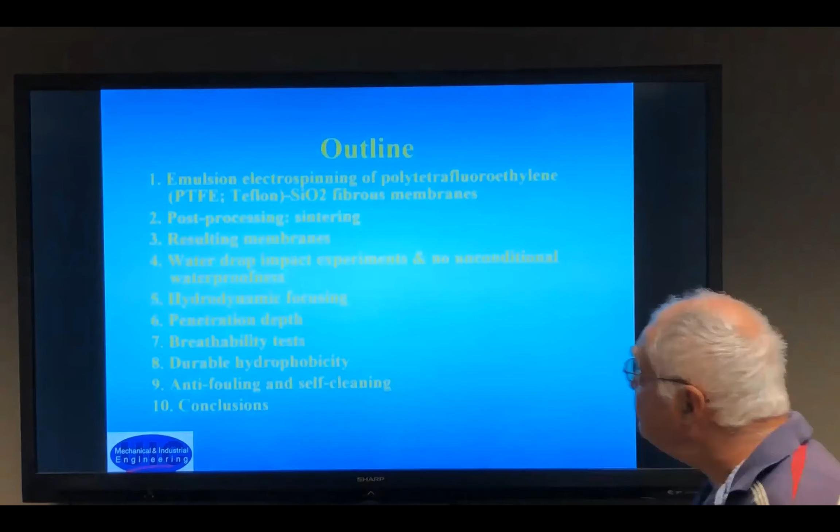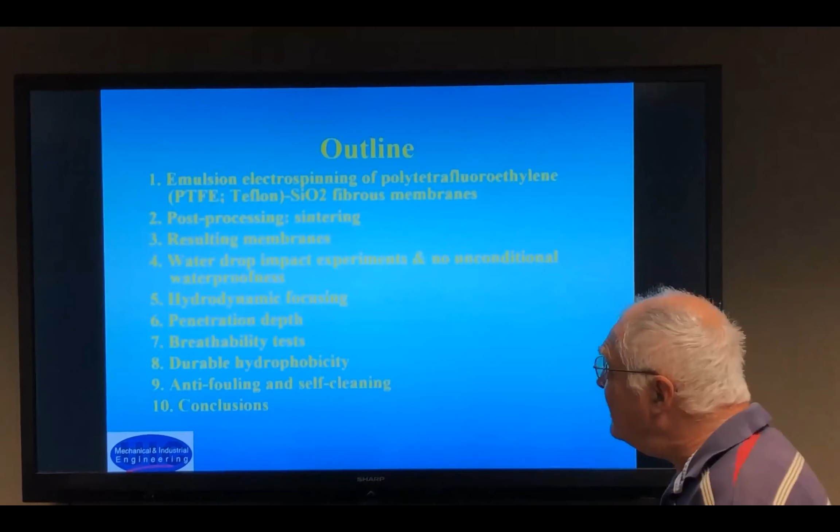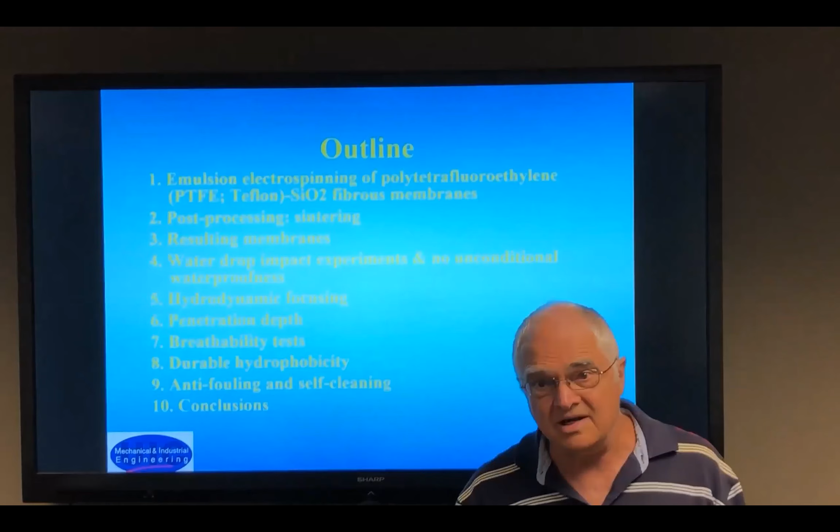A brief outline: how we form this material, a description of the resulting membranes, and some tests showing to what extent they can be super hydrophobic and waterproof. If time allows, I'll also mention breathability, durability, and anti-fouling properties, which are also important for this material, since it's developed not only to be super hydrophobic and water repellent but to possess other properties as well.

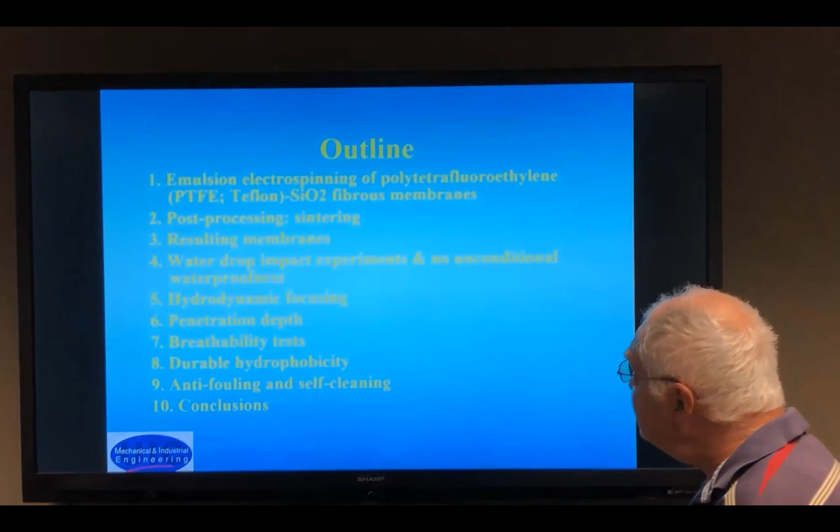The first step is the fabrication process: emulsion electrospinning. I assume you know electrospinning, since Professor Senpilan is definitely an expert in it. In brief, this is a process that allows you to make nanofibers, and in this case the starting material is a suspension.

This suspension incorporates a polymer solution, which is polyethylene oxide solution, Teflon particles, and glass nanoparticles. Each component has its own role in this process. After electrospinning, you end up with fibers incorporating all of these materials.

The skeleton of the fiber is predominantly polyethylene oxide (PEO), with a lot of Teflon particles and glass particles. To make this material super hydrophobic, you need to remove the template material, which is PEO. This is done by sintering—heating and holding the fibers for some time—which removes the PEO and sinters the Teflon particles, leaving Teflon and glass beads inside.

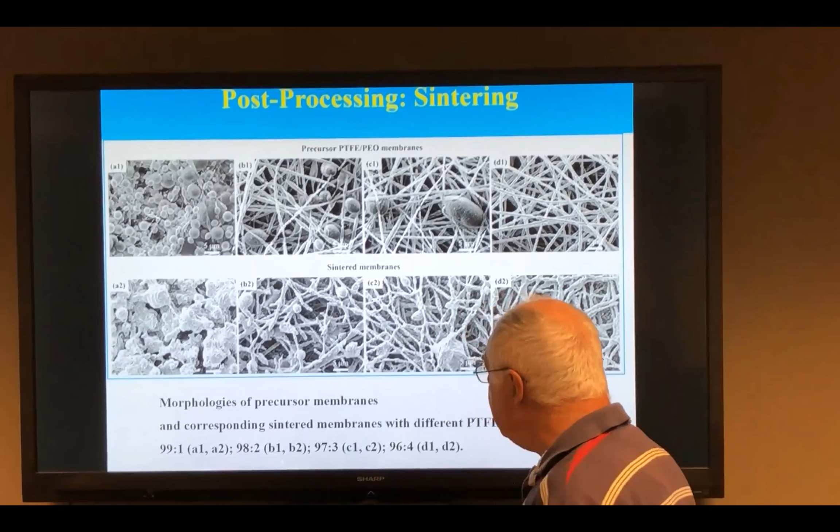Here you see sintered fibers covered with a lot of PEO, which is not good, because when you expel PEO from inside, it accumulates outside. So an appropriate combination of PEO and Teflon must be found, resulting in fibers like those shown here, or the precursor membrane shown here. The best original membrane produces a reasonable sintered membrane, and importantly, the fibrous structure is preserved—this is a porous membrane with interconnected pores.

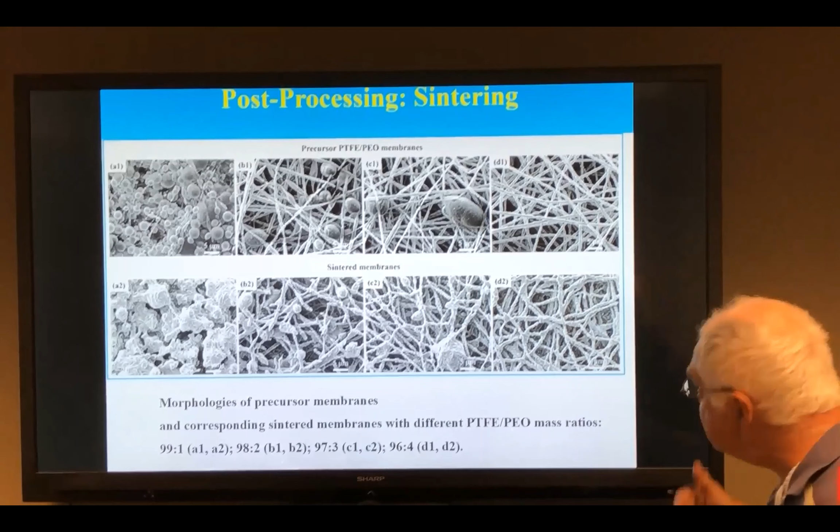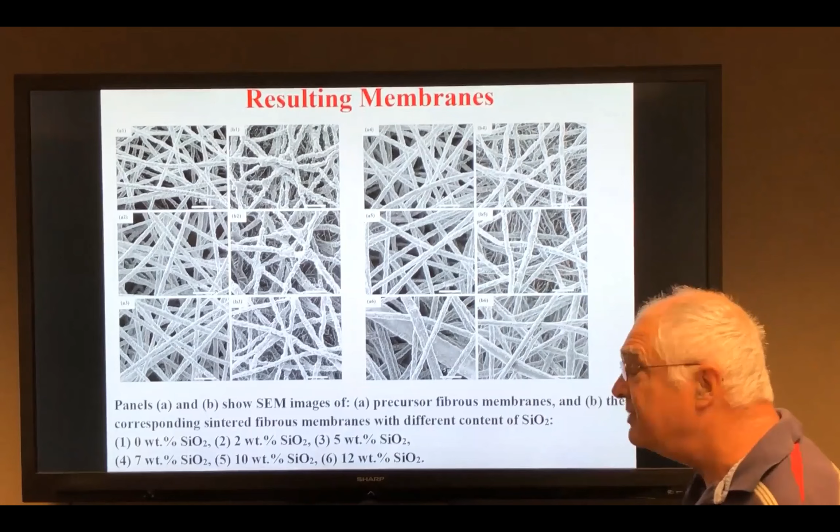best composition. By the way, these compositions are judged not only by the fibrous structure, but also by durability in abrasive tests and waterproofness in dripping tests, as well as self-cleaning. So essentially all these different compositions should be tested, and after all the trade-off should be found, and that would be the best composition. So please go ahead.

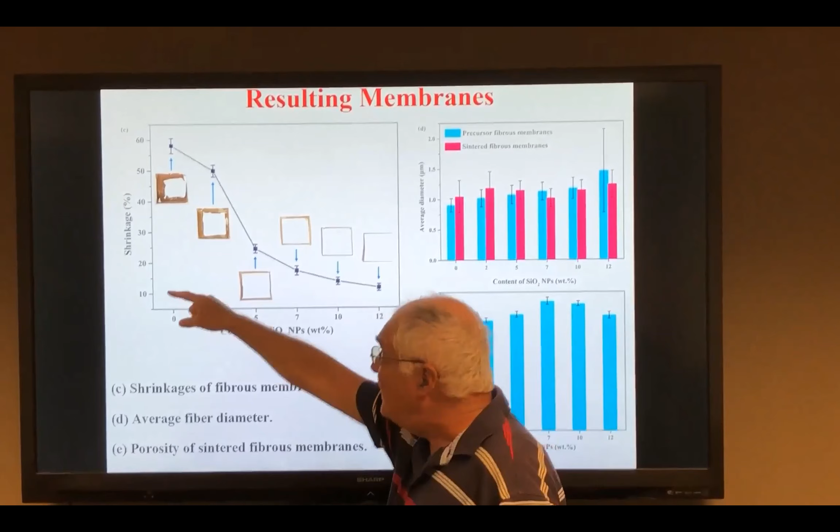Now, as I told you, fiber membranes shrink during the sintering, and you should expect a reduction in mass, and a certain content of glass beads can reduce this shrinkage. For example, with more glass beads, you have shrinkage of only 10%. With less, you have up to 60%. So then you also expect to find the fiber diameter.

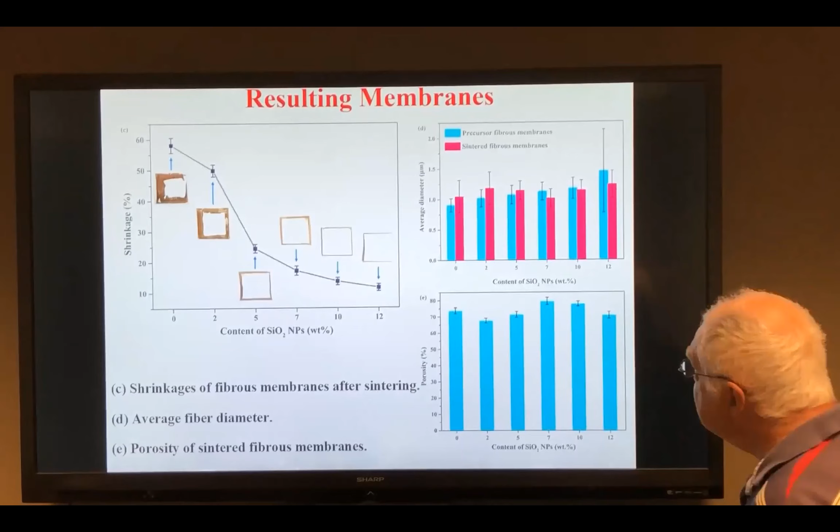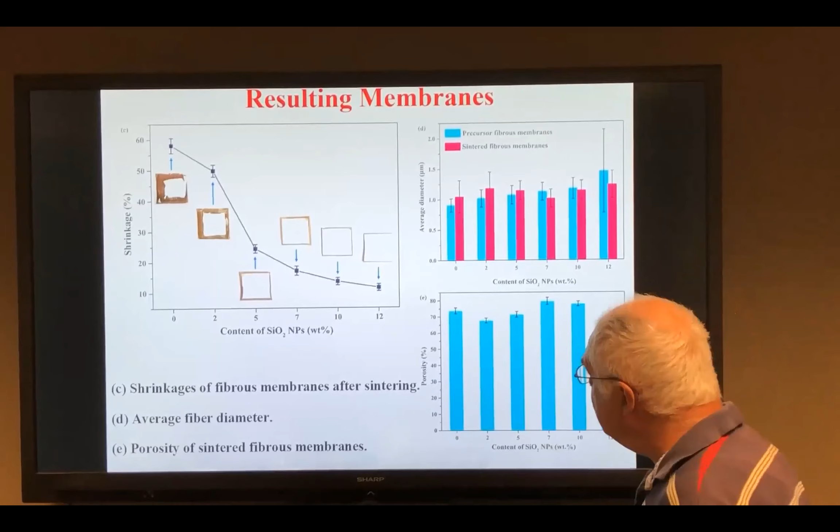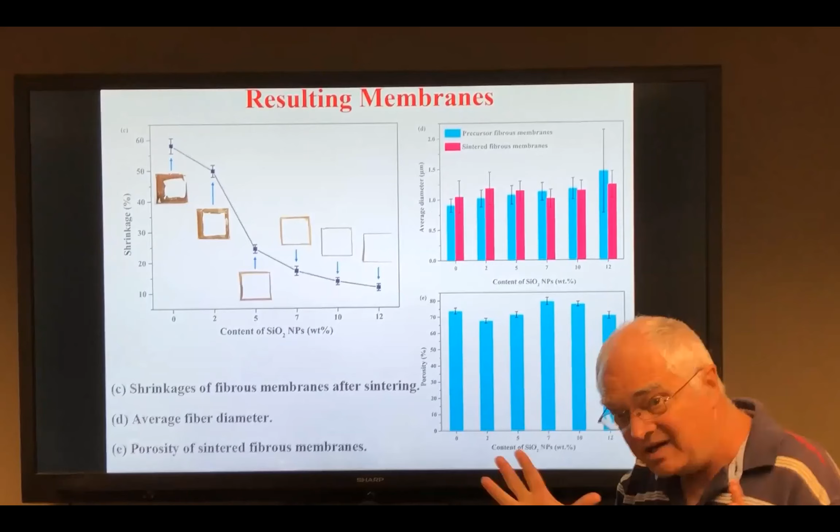The fiber diameter before sintering and after sintering is illustrated here. We are talking about fibers with diameters a little bit submicron or micron size, so I would call these microfibers, not nanofibers. Regarding the content of glass particles, you also see some tiny variation of porosity, so this is good. Essentially, it means that at all these glass bead contents you keep the general architecture of the membrane.

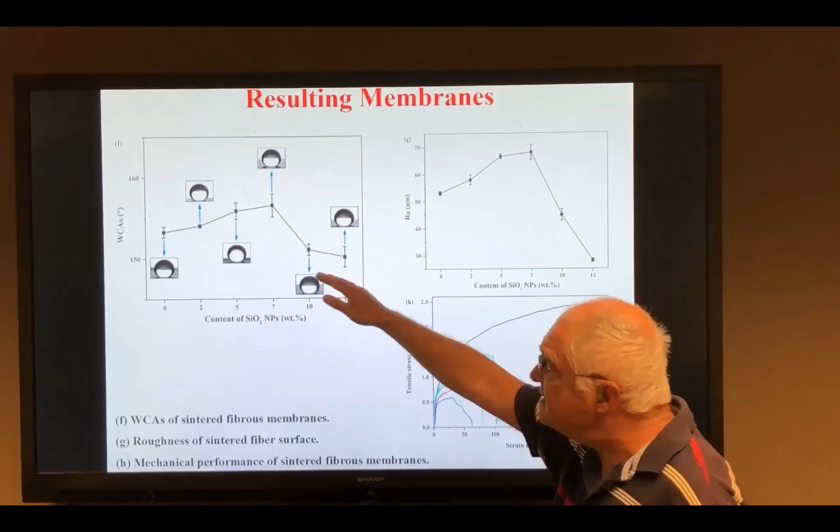Please go ahead. Then you also test water contact angle, to what extent the membrane by itself is superhydrophobic. You put a droplet softly on top of the membrane, different compositions obviously, and you see that the contact angle is always about 150 to 160 degrees. So the material under this water droplet looks absolutely superhydrophobic, which is considered in this field a good sign, and in many cases it's considered to be the ultimate proof of superhydrophobicity.

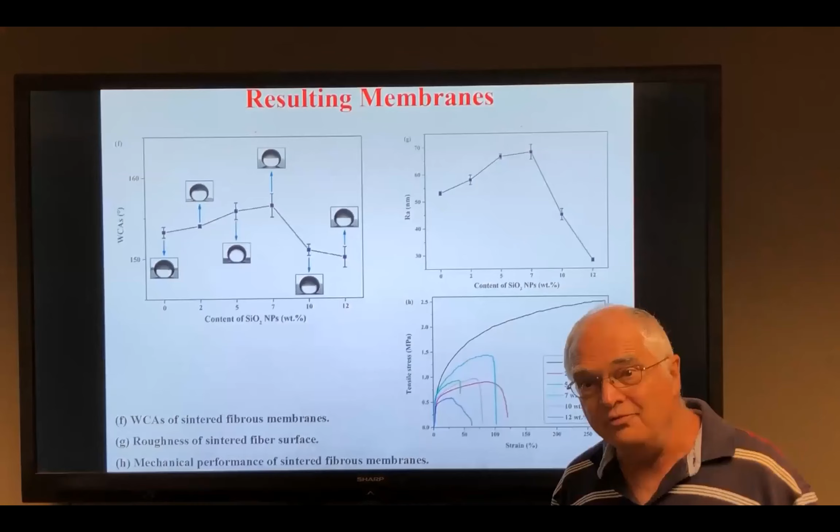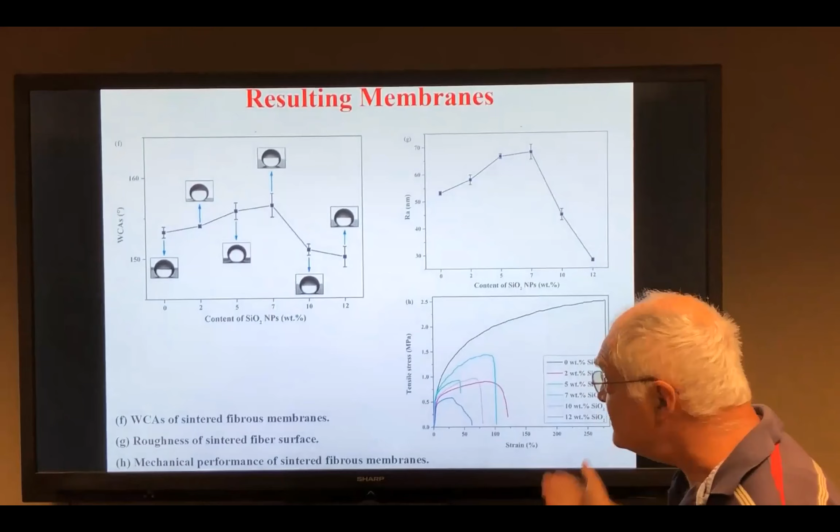In the following, I'll show you that this is not the ultimate proof, and there are essentially no materials which can be superhydrophobic. Superhydrophobicity will be proven to be a conditional property. Okay, so roughness also varies; you see the roughness illustrated here on the nanometer level. We also tested mechanical behavior, because it's important how robust the membrane is. So you measure stress-strain curves. I don't have time to discuss this, but you can find some details in the first publication we already put out. So please proceed further on.

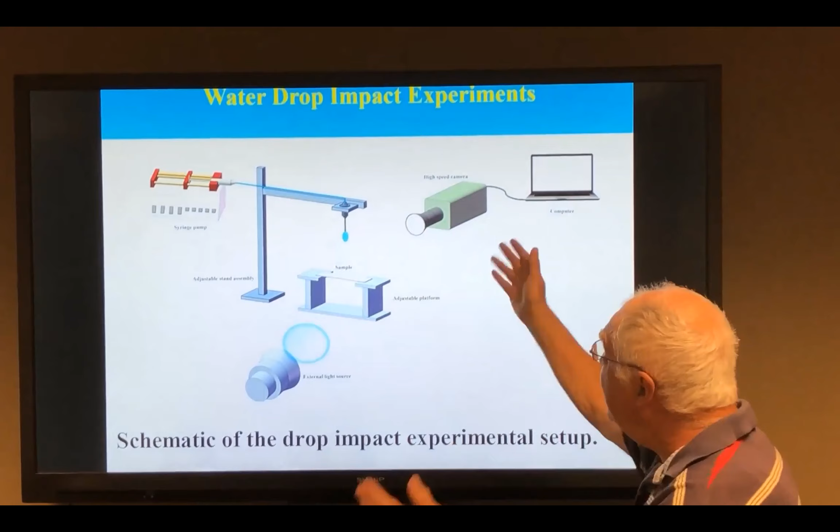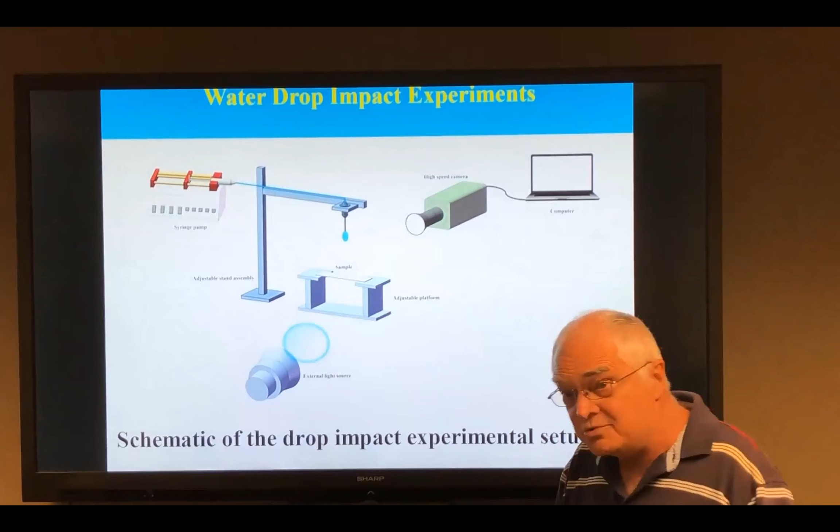The next thing is a water drop impact test. If you have a super water repellent material, let's say for clothes, you are interested first of all in how it would behave under the impact of raindrops. So let's do exactly the raindrop type of experiment. We'll put our membrane here, drip a droplet under gravity, and take high-speed imaging to see what happens with water which comes to the membrane, which is presumably superhydrophobic. Okay, let's go ahead with this experiment.

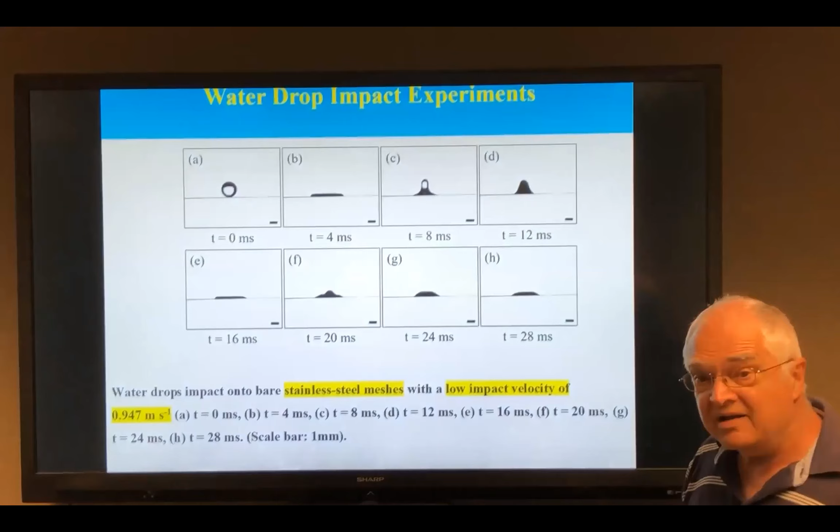The first experiment is not with a membrane, but with a grid, just a metal grid which will be used as a support for a very thin membrane. You drip a droplet with a relatively low velocity of about 1 meter per second onto the grid, and you see the time development on the scale of milliseconds, and everything is good. The droplet hits the grid, oscillates back and forth, and ends up on the outer side of the grid. This is a good sign for the grid, which does not even pretend to be superhydrophobic. It just protects. Okay, let's go ahead with the same grid.

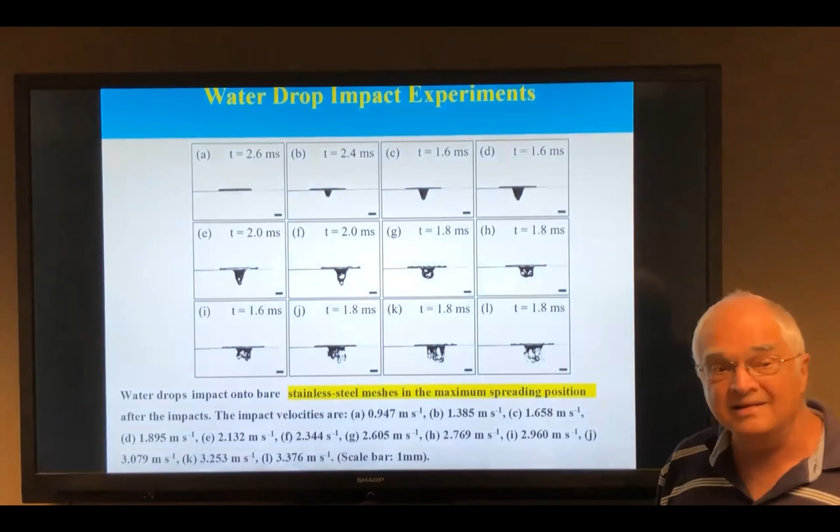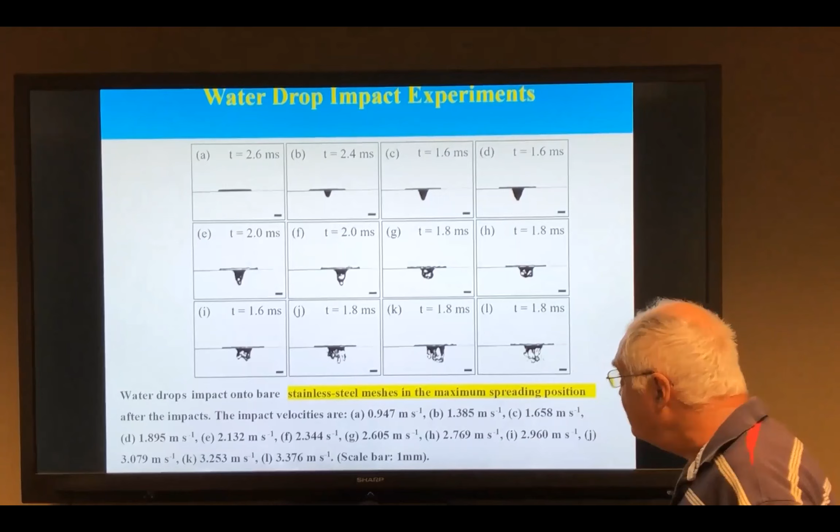We'll increase the impact velocity, just moving the nozzle higher and higher. And you see that immediately there are several velocities where you can have the droplet going through the grid. So the grid essentially does not protect from water, because water can cross the grid and penetrate to the body if we are talking about clothes. So next slide, please. Now we are going with our membrane.

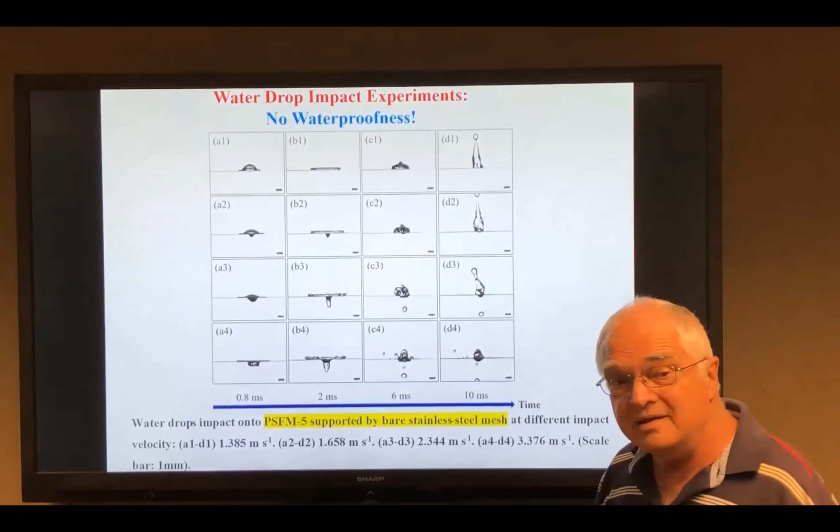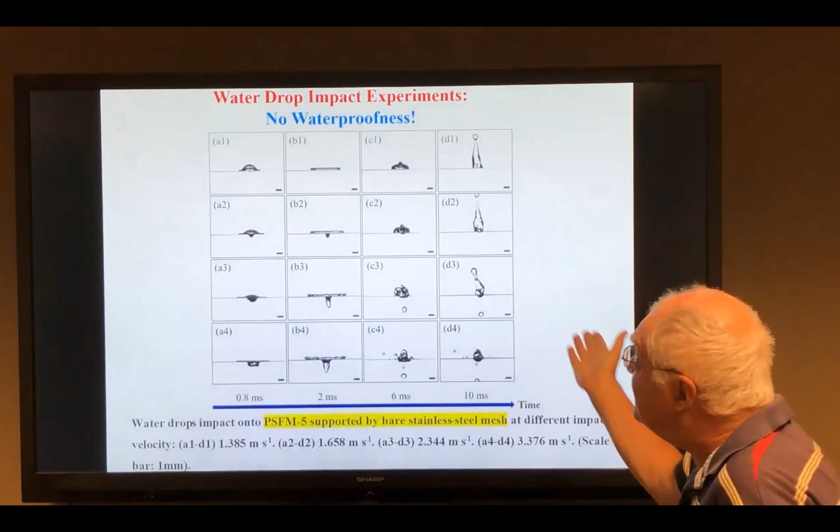At the higher speed, you see that our membrane suddenly appears to be not superhydrophobic, okay, because water goes through, so it doesn't protect. So there is a dramatic difference between the softly deposited droplet and a droplet dripping. So what's the reason for that? So this is not a waterproof membrane then. Please go ahead. The next one.

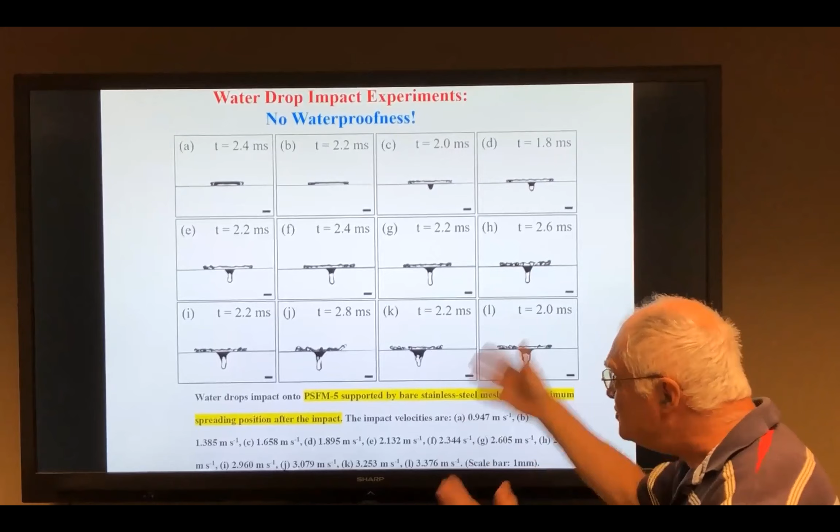Okay, so once again, you drip at different velocities, different meshes, and different membranes, and you see that water droplets go through. So something is basically wrong with this membrane. So let's proceed further on. Okay, now let's restore waterproofness. So how do we want to restore waterproofness?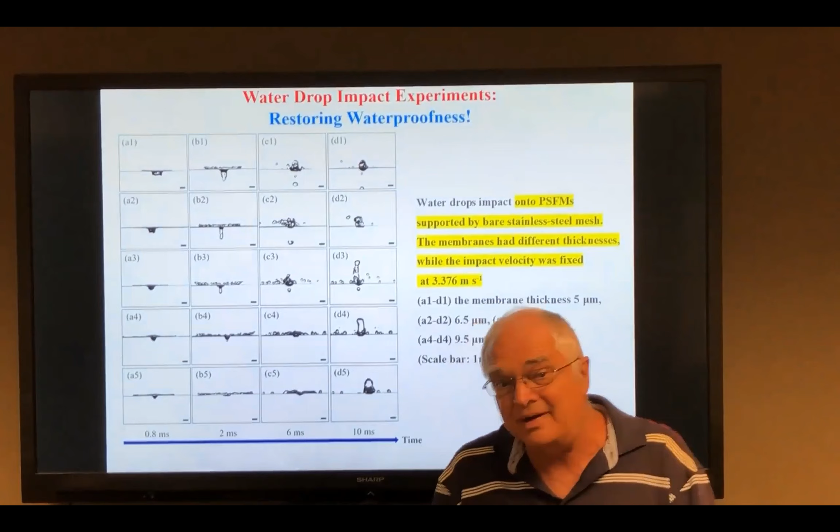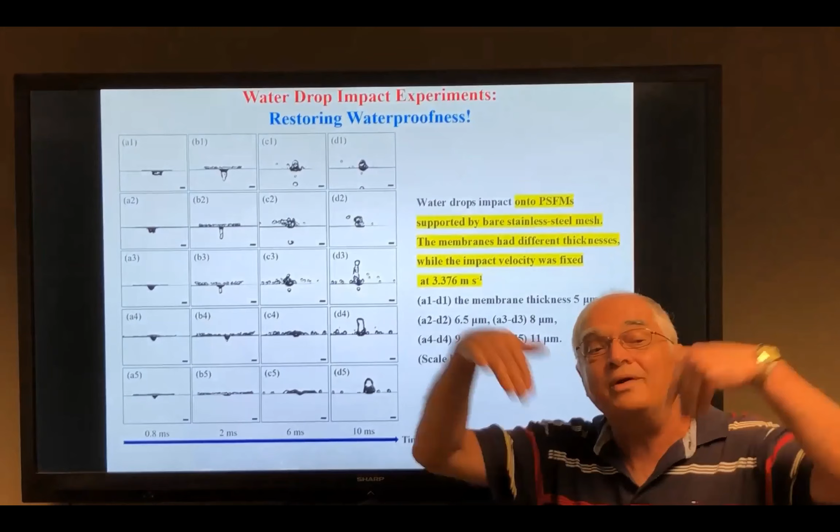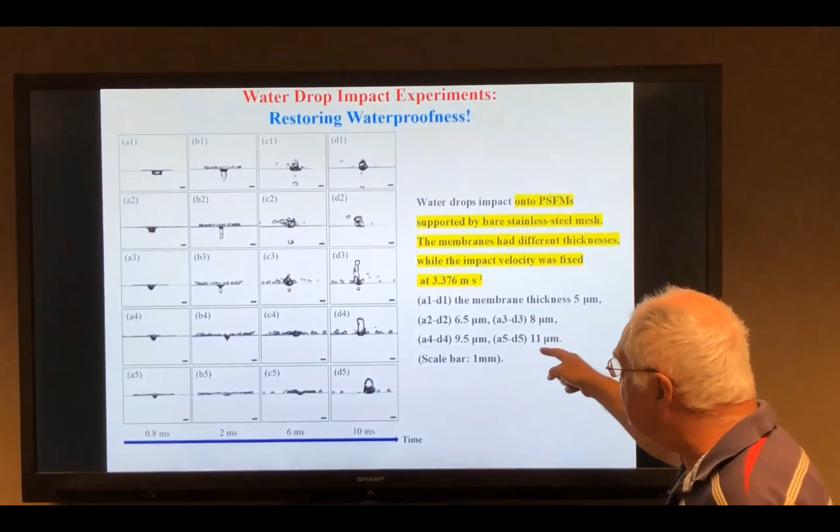Let's make the membrane thicker and thicker. So the idea is to make as thin as possible a membrane to protect against water droplets. But you see that it's impossible to do. Then you have to go thicker and thicker, to stop water already penetrating through viscous dissipation. That's the idea. So when you go to higher and higher thickness, for example, here there is a demonstration up to 11 micron thick membrane, then you can prevent water from practically going through.

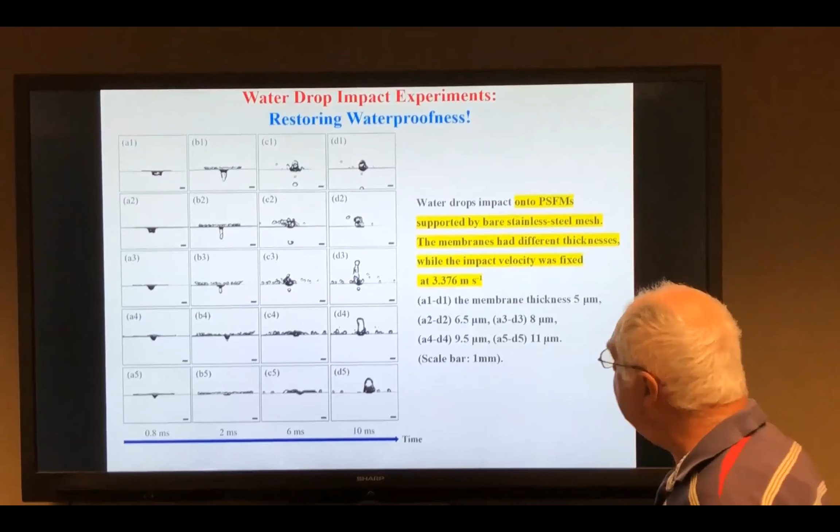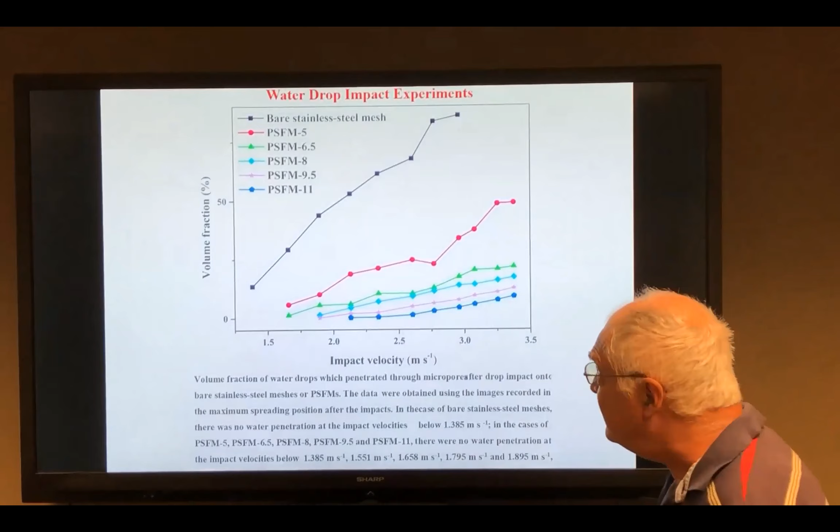Next slide, please. So here we demonstrate the volume fraction of water which goes through the membrane at different impact velocities. See, the higher the impact velocity, the more water goes at a fixed thickness. So if you want to diminish this, you have to make a thicker membrane. Please go ahead.

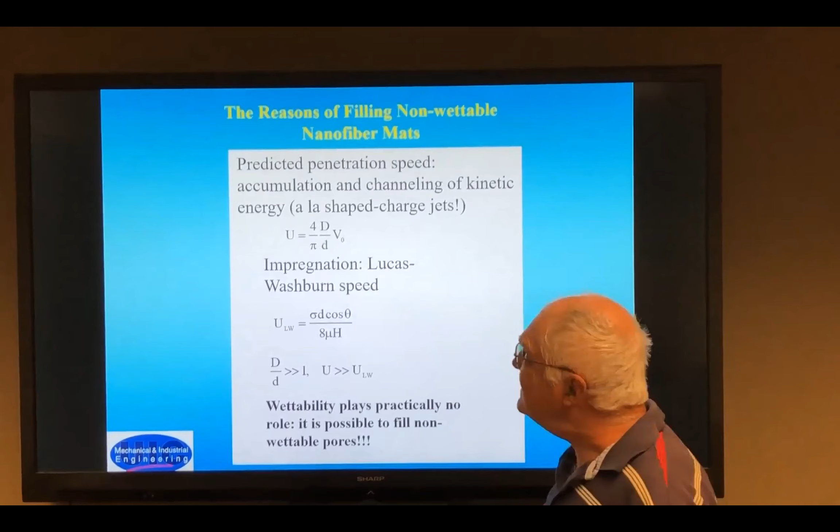Now the reason for this failing waterproofness is the so-called hydrodynamic focusing effect, which we once discovered. So essentially, when a water droplet impacts at a pore of size d, and the droplet size is capital D, and it impacts with velocity v0, then the penetration velocity is given by this u, and the ratio of capital D to small d, if the pores are small, might be on the scale of 100 or even 1000.

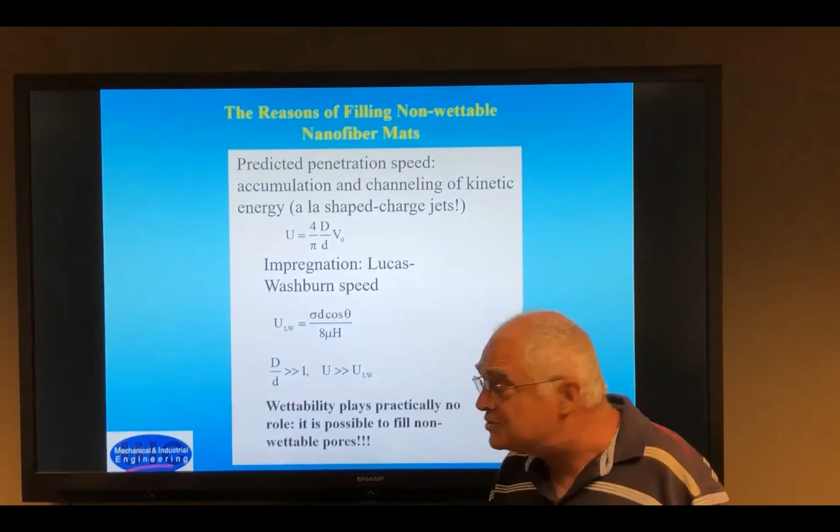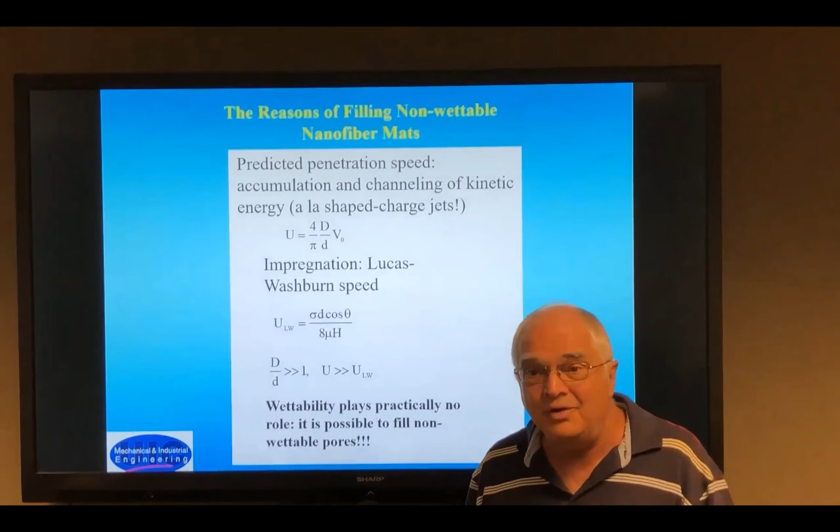So it means that the kinetic energy which is coming with this big droplet is channeled into a very small pore. As a result of that, the penetration velocity is so high that whatever wettability-related velocity, predicted by the Lucas-Washburn formula, doesn't matter. So therefore you can essentially deliver water into Teflon, any superhydrophobic material. That's exactly what happens. Please, the next slide.

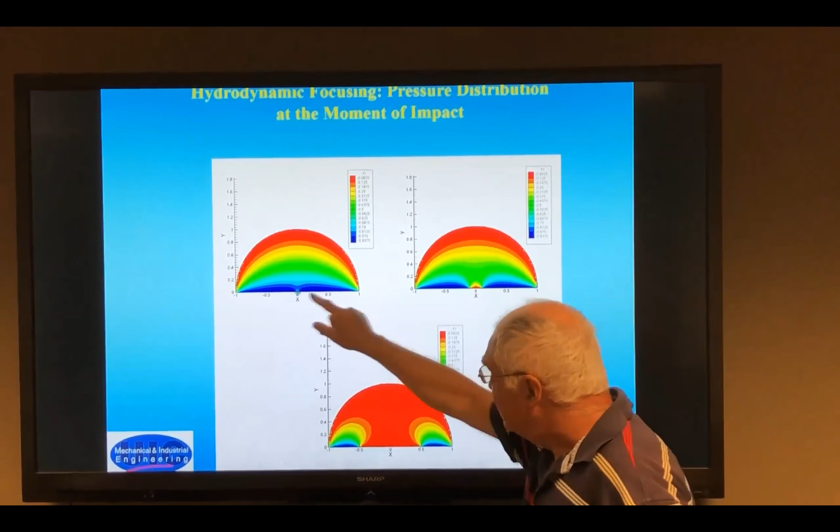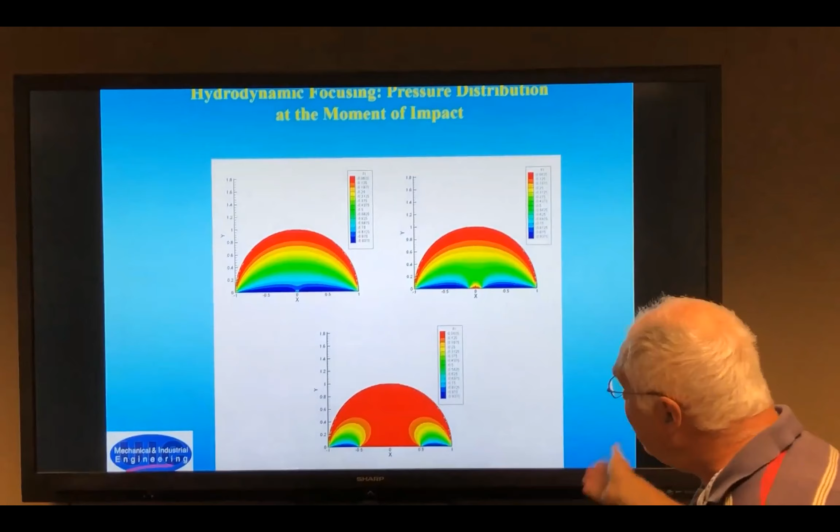So this is the theory which we developed. It shows you where the pressure is during the moment of drop impact. So when the opening is very small, like here and here, you have very high pressure developing in this area. As a result of that, water goes in. This is a detailed hydrodynamic theory. I have to skip over this, and please go ahead.

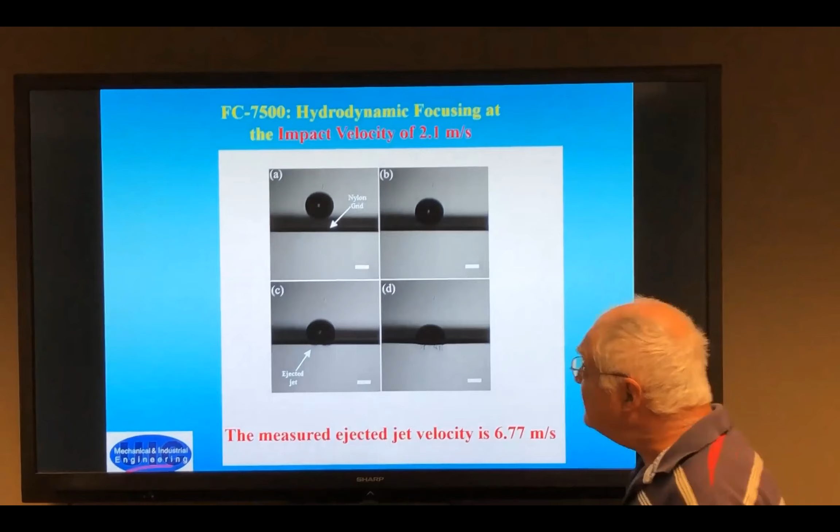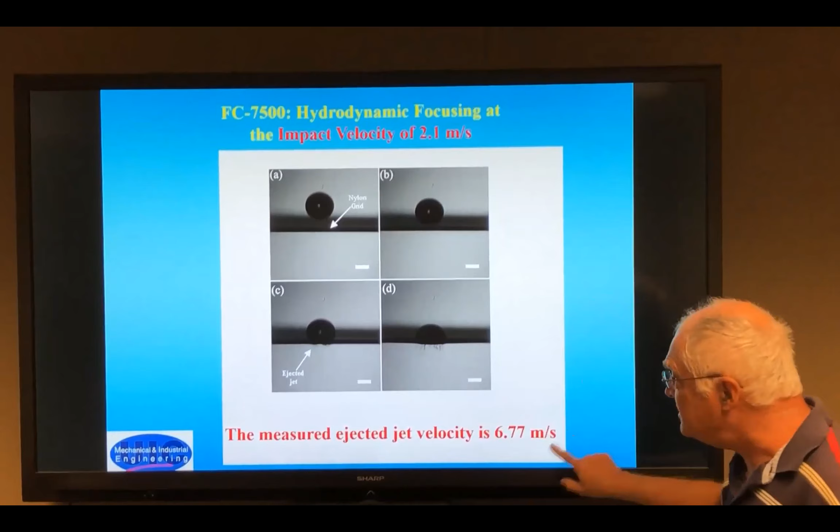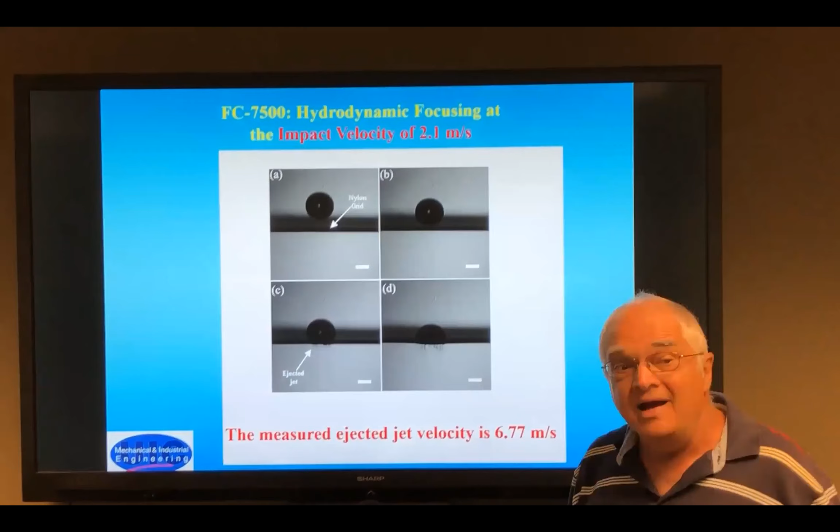Now, is it possible to prove that what I'm telling you is true? Yes, that's a direct measurement we did, and you see here some individual jets coming from the membrane pores, and we can measure the velocity of these jets. And what is interesting is that the measured velocity of this jet is higher than the impact velocity. So even though you dissipate a lot of energy during flow in the pores, still the ejected velocity is higher than the injected velocity. That's exactly the result of the hydrodynamic focusing. Please go ahead.

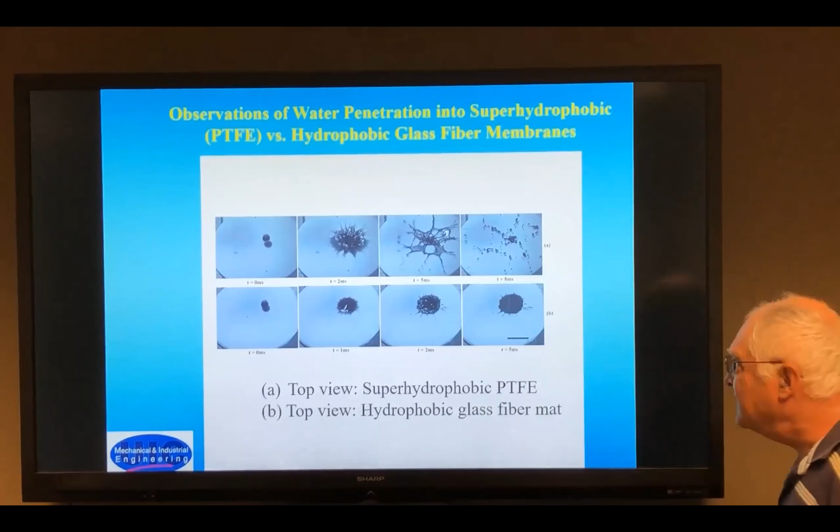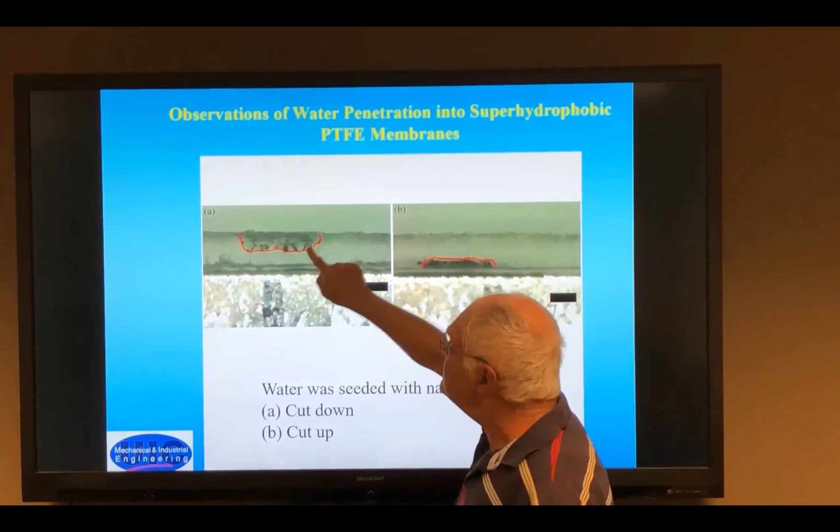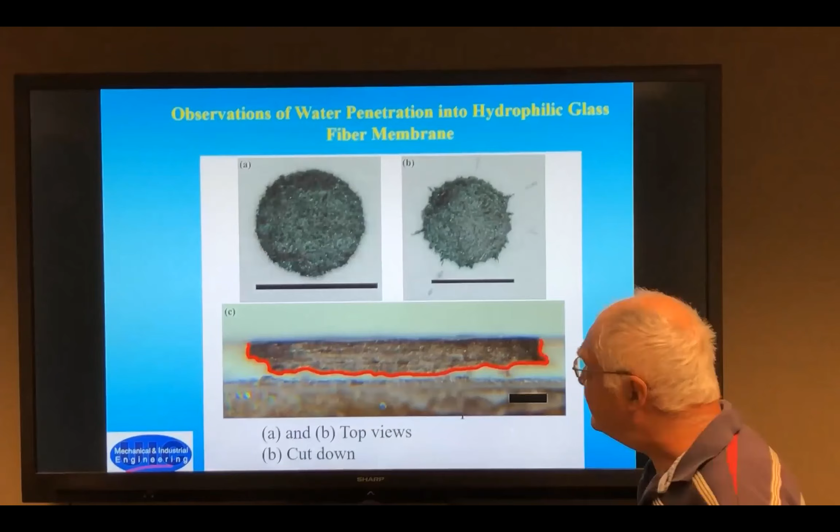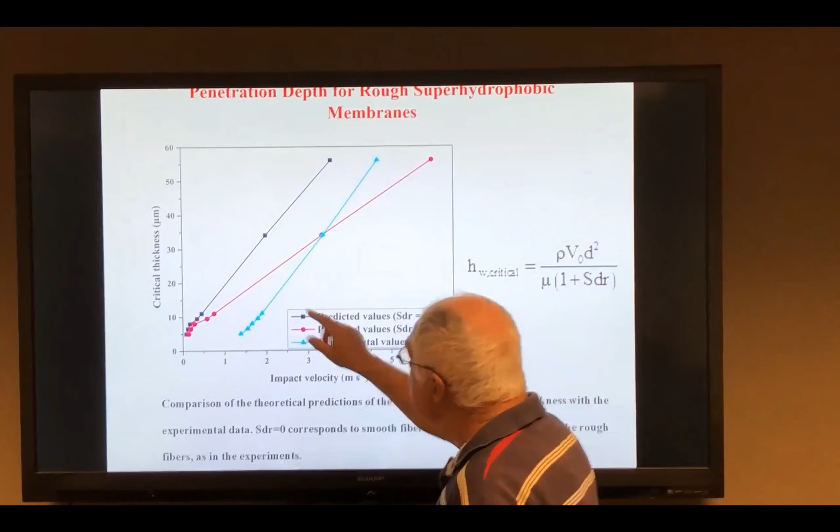So then the critical thickness. I told you that the membrane should be thicker and thicker to stop penetration, and we developed a theory which essentially accounts for the viscous dissipation inside the pores, and that's a prediction compared to the experimental results. So this is a prediction, this is the experimental results, at least in the same range. This is a critical thickness. So you see that when you go from like 10 to about 50 micron thickness, you can prevent penetration up to about 5 meters per second, which is of interest for water droplets.

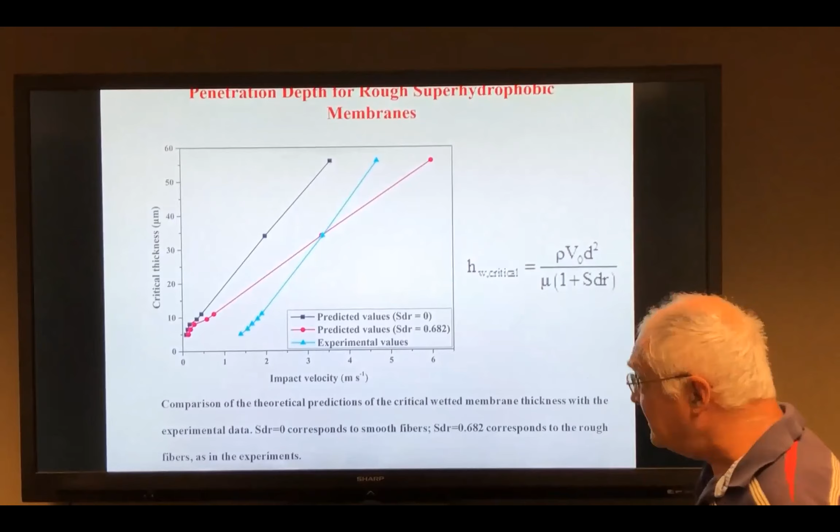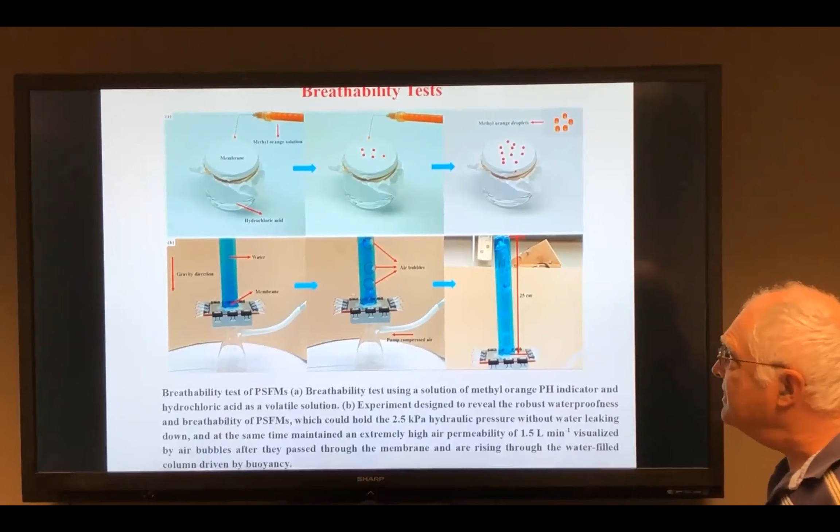The next slide, please. So just in brief, these membranes should also be not only impenetrable for water, but they should be penetrable for gas, breathable.

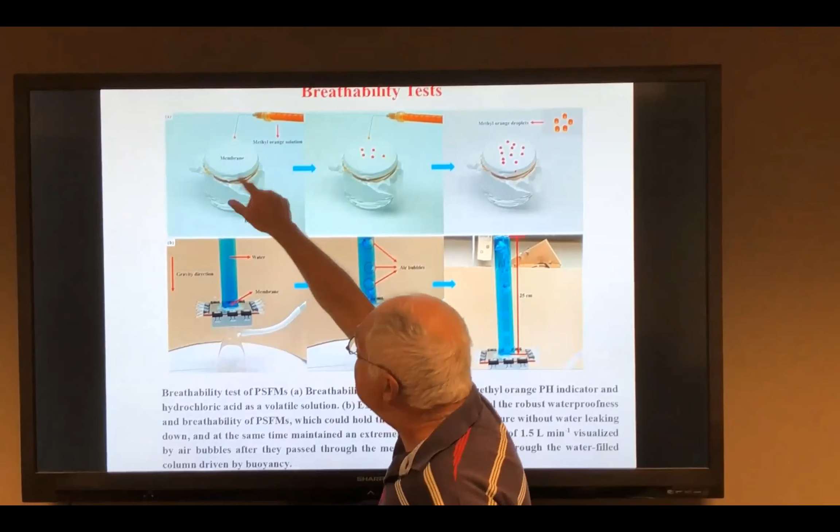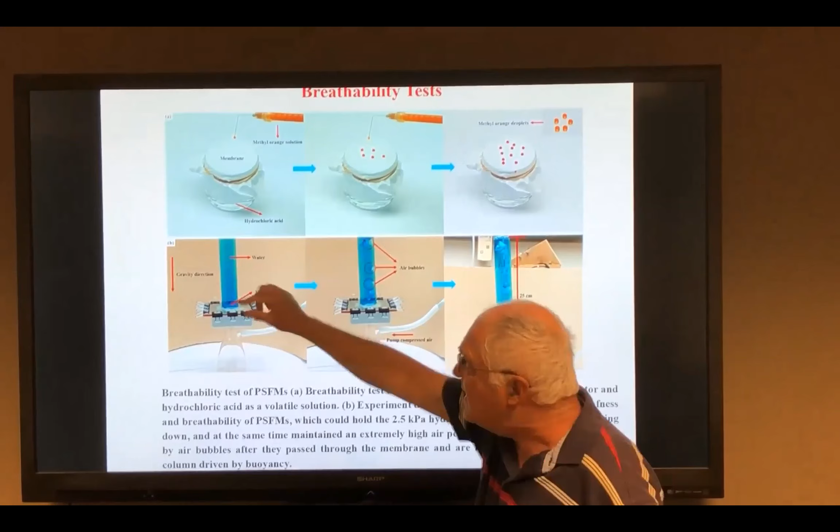So this is one of the experiments, when hydrochloric acid evaporates through the membrane, and the marker, like a litmus paper, is located on top, and the marker changes color. So that's a manifestation of penetration of vapor through the membrane. In other cases here, water is in the pipe, the membrane is under, water is not going through this membrane, okay? However, gas is supplied here, and gas bubbles go through. So once again, penetrability, breathability is proven here.

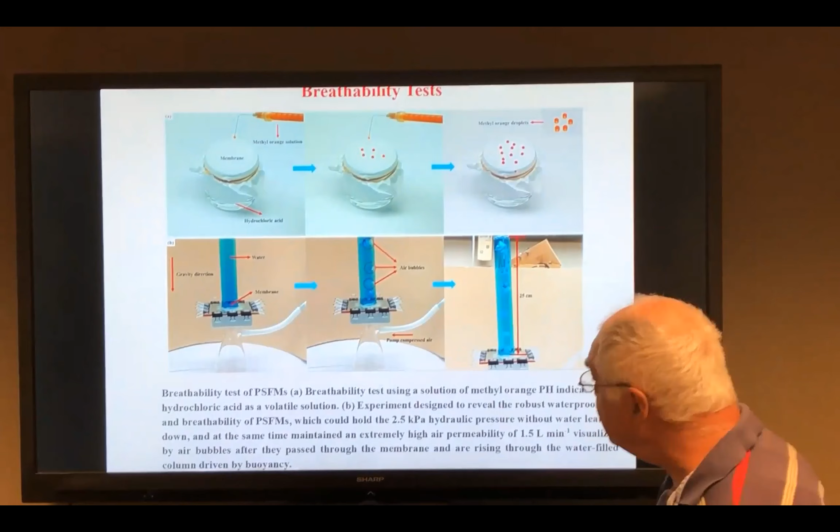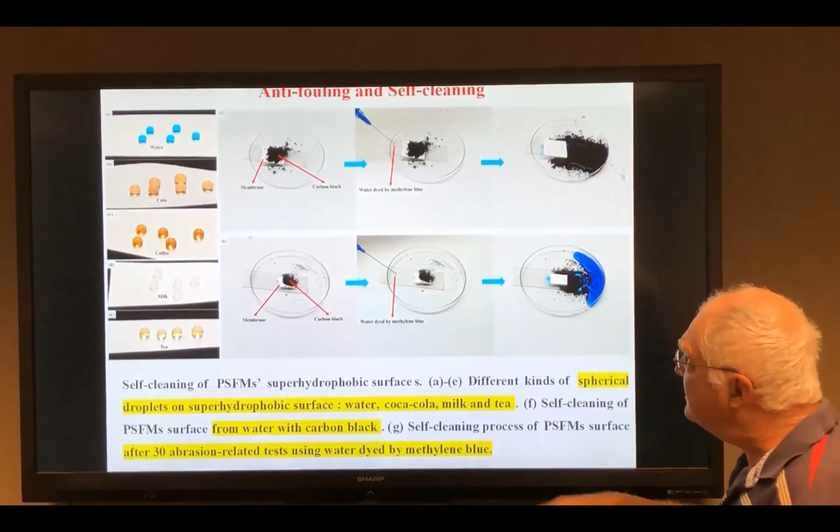The next slide is the illustration. Okay, I'll skip this over because it's just a summary. Let's go to the next one. And the next one is anti-fouling and self-cleaning. So you can put different liquids, droplets on top of this membrane, and you just tilt it and they roll over. Then you can put carbon black, and using a small water jet, you immediately wash it away. So you can do this even with membranes degraded by abrasion test, and still you're good and self-cleaning. So all in all, let me come to my conclusions.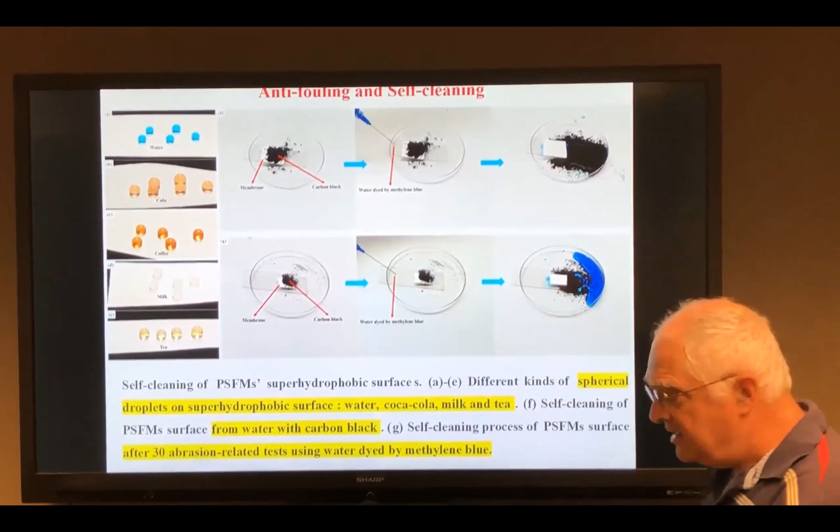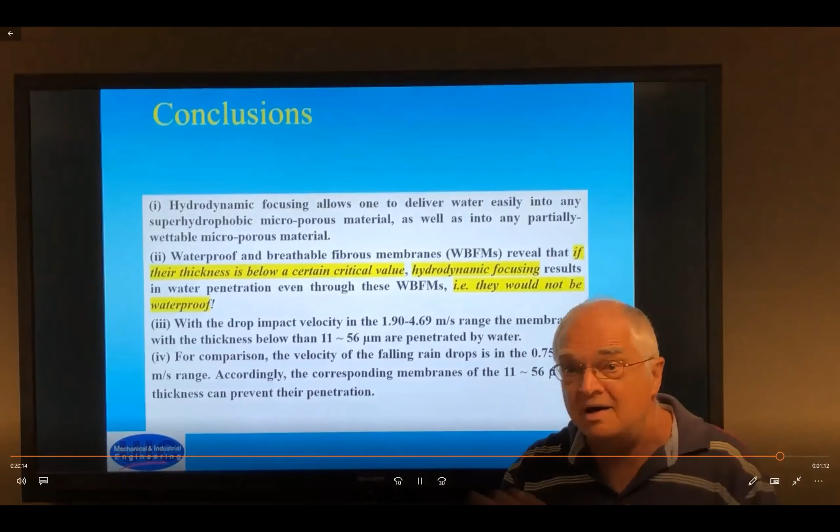So the conclusions are shown here. The hydrodynamic focusing essentially can bring water through any membrane, superhydrophobic, not superhydrophobic, and the dynamic test like that should be done to prove that the membrane can withstand water droplets. This is number one. Now, if you have a thickness below a critical value, the membrane fails. If you have a thickness higher than this critical value, only then the membrane would be waterproof.

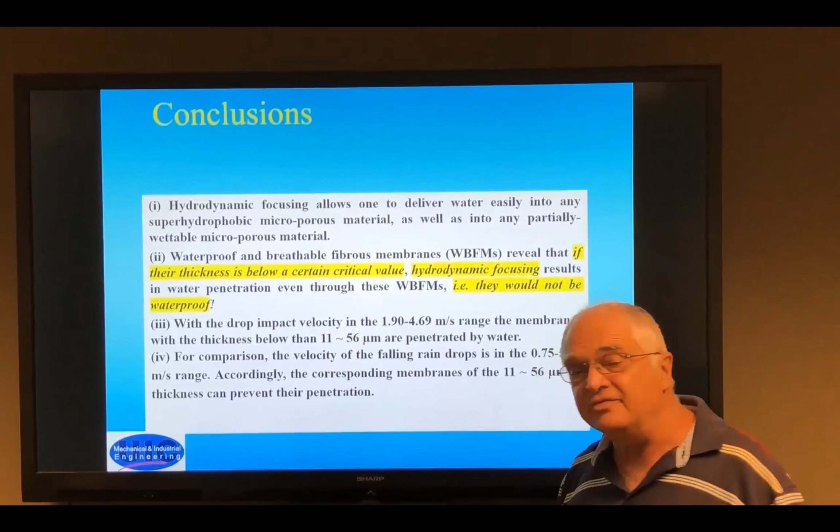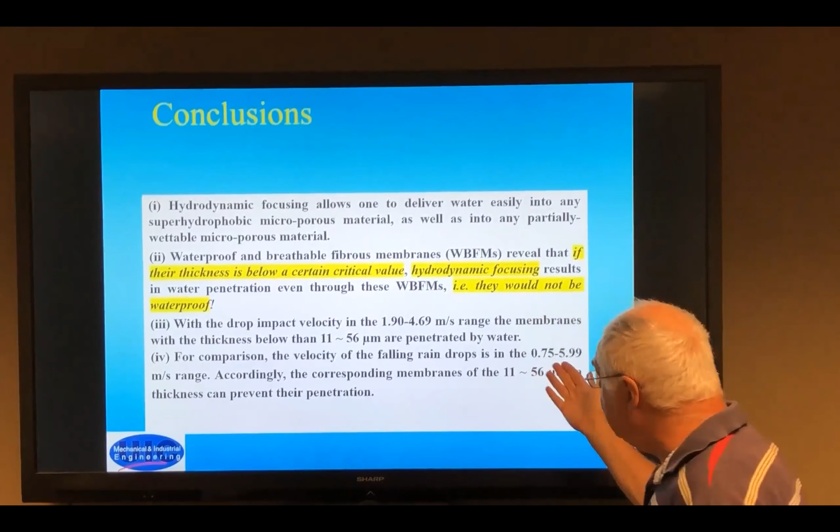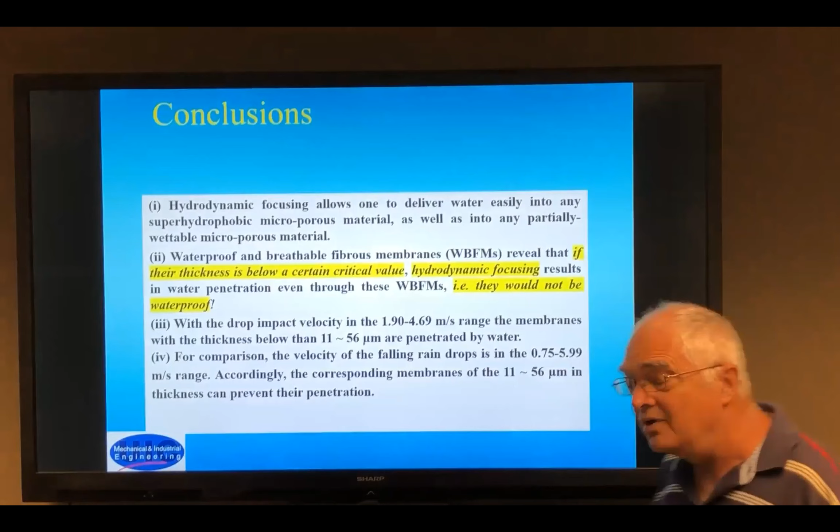Now we show that essentially in the range up to 5 meters per second, what will guarantee waterproofness would be membranes in the range from 11 to 56 micrometer, not less than that. Less than that, water droplets will go through the membrane. For comparison, water drops can go up to 6 meters per second. Therefore, to be sure that you have protection from water droplets during rain, for example, you have to have at least a thickness of 11 to 56 micrometer, not less than that.

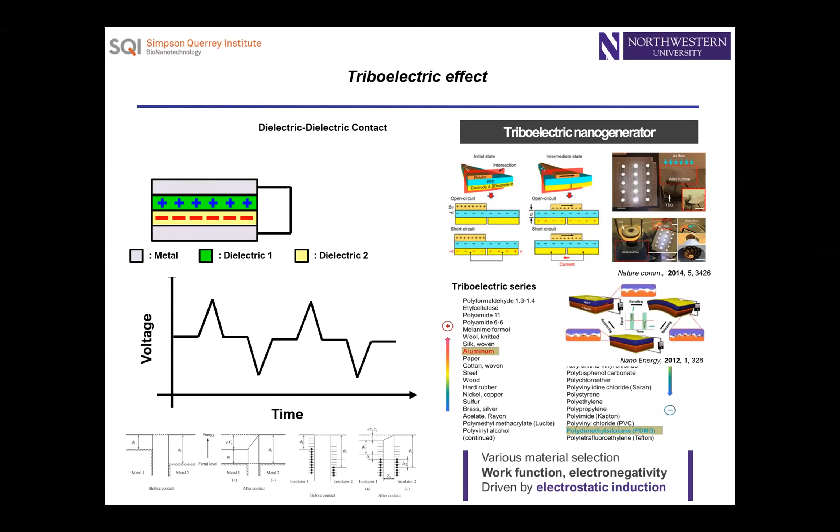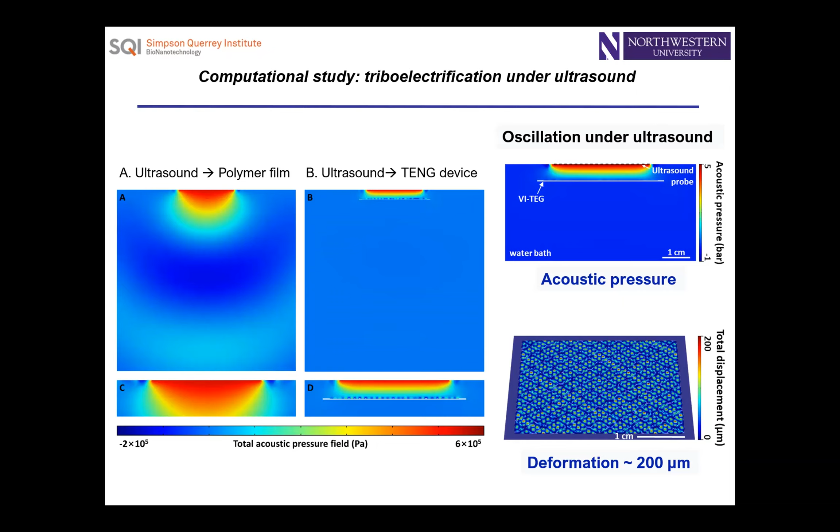So let me jump to the computational study. We went through a computational study to see what level of pressure and thereby deformation takes place under an ultrasonic environment. We found that with a layer structure including the polymer and a metal electrode with higher acoustic impedance, there's a chance to increase the acoustic pressure between the polymer and the metal. This will cause a level of deformation through the polymer, like 200 micrometers, which is not really significant, but it's feasible if we design our device below that value. So based on this calculation, we designed our device with lower than 200 micrometer displacement.

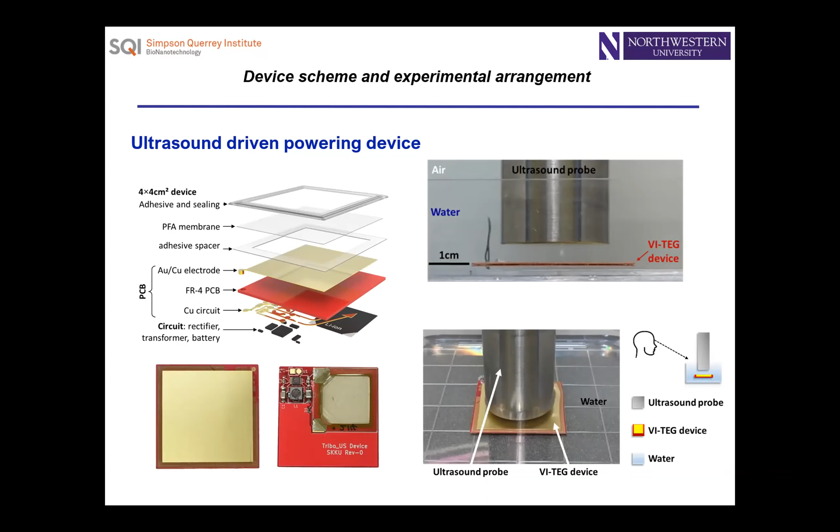So at the beginning, we tested our device in a water environment because ultrasonic attenuation is close to zero in water, so we could transmit ultrasound as much as we can. We use ultrasound at 20 kilohertz, which is an inaudible sound. Generally, in the triboelectric nanogenerator research field, we measure the electrical output voltage and current. About 10 volts of voltage and 427 microamperes of RMS current were measured with a 3.7 by 3.7 centimeter square device.

We chose that dimension because in 2019, when our paper was published, the size of a pacemaker, for example, was within 3.7 by 3.7, which pretty much fits the size of the pacemaker. With this device, we also calculated the power level at optimum impedance. It reaches up to 7 milliwatts when 3 watts per centimeter square of ultrasound enters through the device.

And as mentioned, we also tested our device to see if it is feasible to charge storage. Other than a capacitor, we successfully charged a rechargeable lithium-ion battery within 4 hours, which is pretty outstanding work, I guess.

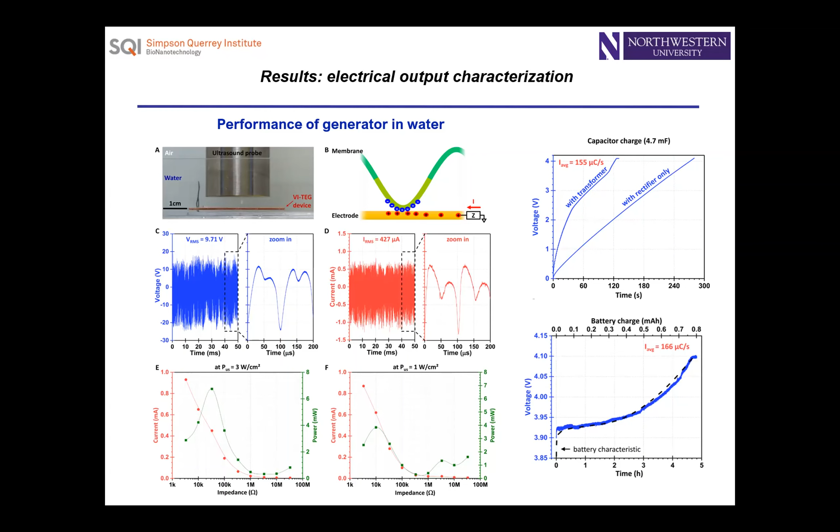And since our device aims to power something implanted inside the body, it will be associated with implantation depth, which is the working distance from the ultrasound probe. Considering the ultrasound source itself, our 20 kilohertz has a maximum pressure level at 4 to 5 millimeters from the probe. That is verified through experiments: the output performance is maximum in that 4 to 5 range because the maximum pressure level highly oscillates the polymer film.

But we also checked with a computational study, which pretty much agrees with our experimental result. The simulation result shows that the displacement at 5 millimeters is the highest, which originates from the maximum pressure level.

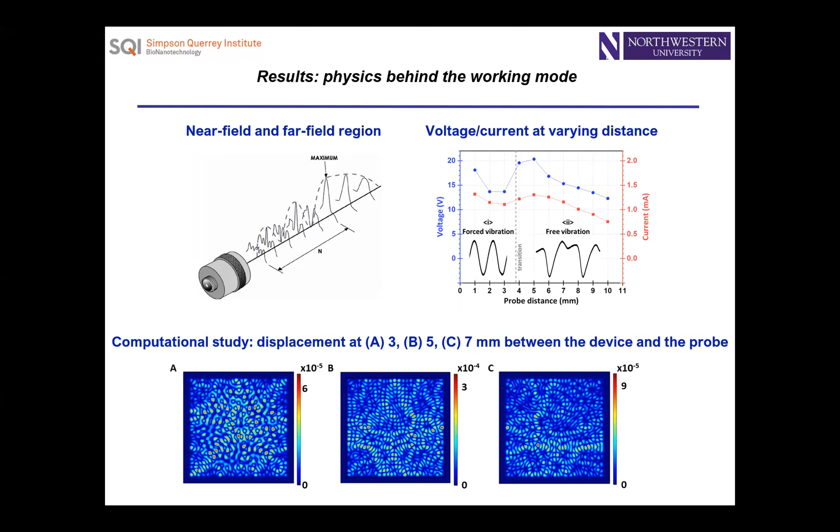Other than the water environment, we also tested our device in various media with varying ultrasound attenuation coefficients. We experimentally found that we could harvest ultrasound even under bovine serum, rat tissue, and porcine tissue, especially porcine skin, which has ultrasonic attenuation properties similar to human skin. This is pretty promising in terms of energy harvesting technology.

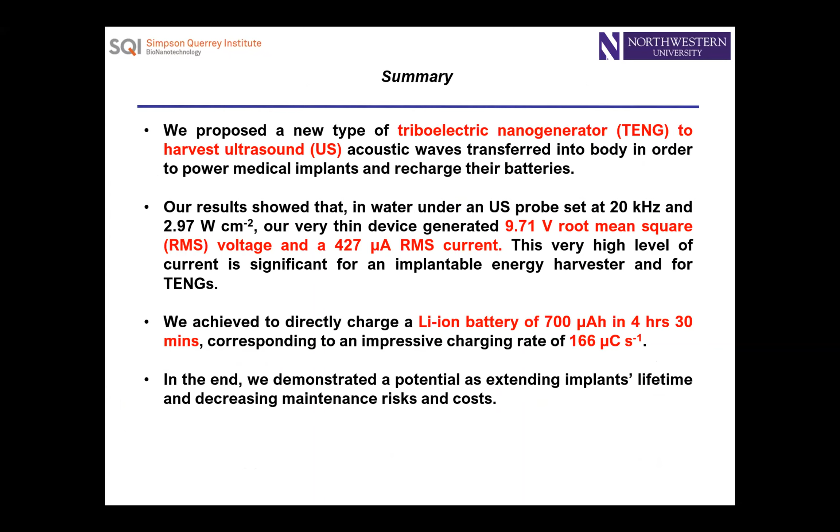So here's a summary. In 2019, when it was published, this project was the first to suggest an ultrasound-driven triboelectric nanogenerator to power medical implants. On top of that, there were no reports of directly charging a rechargeable lithium-ion battery driven by a triboelectric nanogenerator. I'm very glad to achieve this with Professor Sang-Woo Kim.